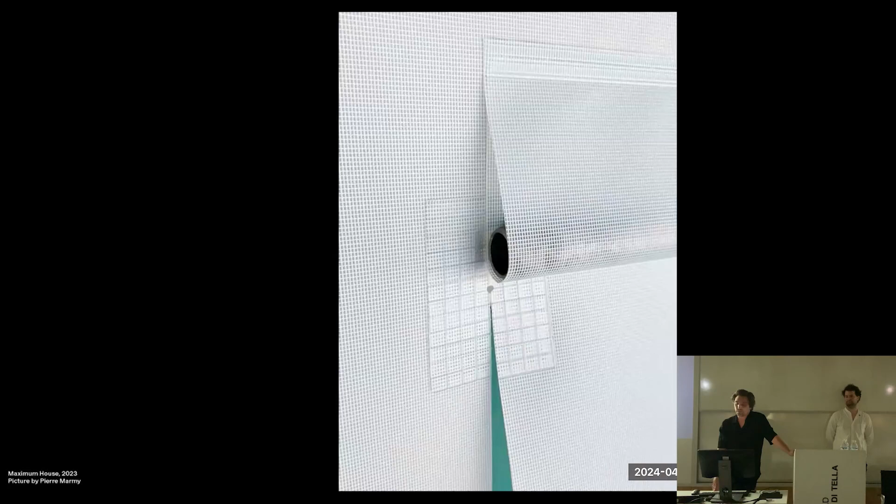But to be really honest, it's also that we love to spend a lot of time on the construction site. So we try to always look for specific answers by learning to react to the situations we encounter, the structures and buildings we find, and to see and enhance the opportunities of the situations we are dealing with. Every time we are re-questioning the constructive elements, the choice of material, and the way to assemble them, and we are always looking for a certain efficiency, trying to achieve more with less.

So let's say we have this fascination of finding the way to put things together according to the specific situation we are dealing with. We are always developing specific details and precise construction logics, as we believe you cannot really answer a specific question with a general solution or a standard detail. We don't believe in the construction detail found in the encyclopedia, copied and repeated in random places without any consideration of context, repeating the same trick over and over again. We are convinced there are no preconceived solutions, and that we need to seriously react to the situations we are working on and enhance them precisely.

We have to constantly question the norms, conventions, and standards. In other words, we need to question what we take for granted and force ourselves to change the way we look at things.

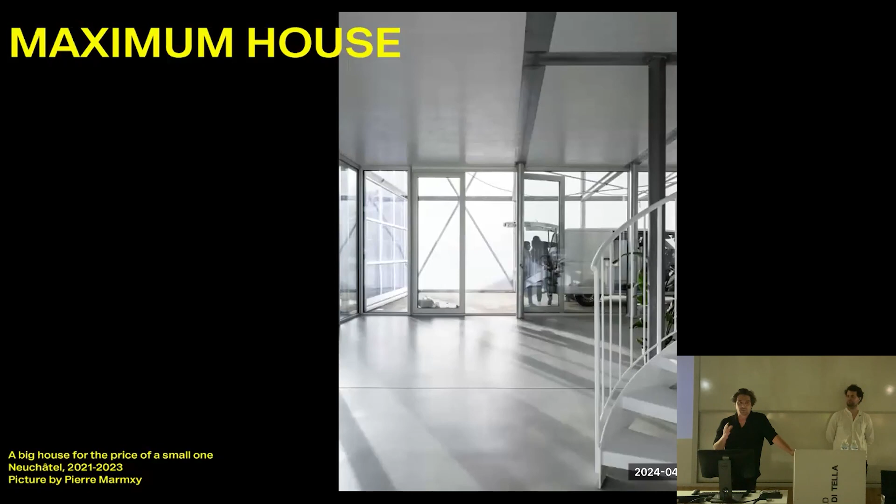So all the previous images we've seen on the screen are from the project Maximum House that we have recently completed. In this case, the biggest challenge was to answer a rather absurd regulation, which was forcing us to build a minimum of 250 square meters on the plot, when only 150 square meters were necessary for the client and feasible within the budget. So we had to turn this constraint into an opportunity. Let's say 1/3 of the house had to be built almost for free.

So this allowed us to maximize the usages and the possibilities by opening the house to a semi-tempered space, a protected area flirting with the boundaries of the insulated limits of the house, almost like living within the facade thickness.

A space that can be used all year round, a covered terrace that can be completely open, a place for parties, sport, game, and workshops.

By regulation and official building permits, it is a parking. But in reality, cars don't really bother to stay outside, leaving the inhabitants the freedom to appropriate the space in many ways.

On the upper space, each room benefits from the maximum generosity as possible, by literally pushing back its limits, the space always opens towards the next one, flowing further out.

For example, here we can see, in the middle, both children's rooms that can be completely combined into one big one, thereby neutralizing the lost space of the corridor, which disappears from the plan.

We also cherish very much the quality of the bathroom in direct relation to the winter garden, being able to take a shower almost outside by fully opening the window.

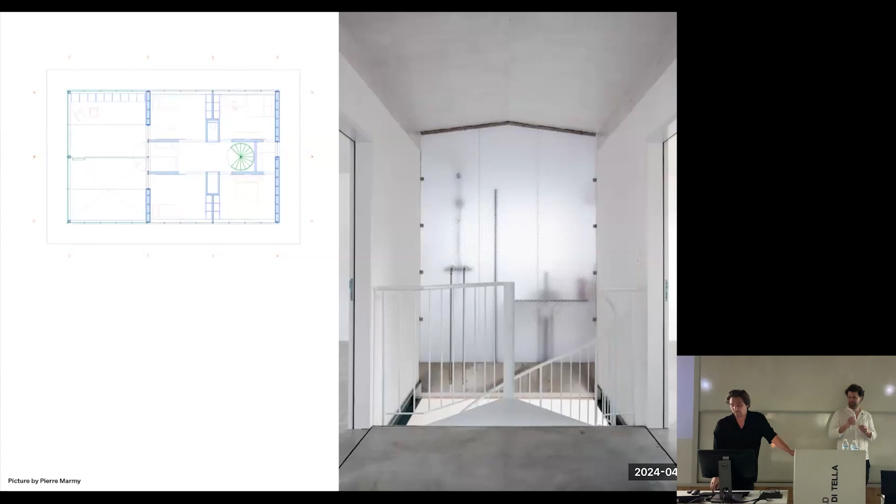You see a bit more this children's playground combined with the bathroom, basically used as one space, but also able to close both big sliding doors and sleep at night.

The additional surface area is basically obtained by distancing the final layer of the facade from the rest of the composition of this main facade.

It's a tension membrane that ensures the house is watertight, which we had to build anyway. We just took the opportunity to push it away, to distance it from the facade or the insulation of the house, therefore creating a space in between.

The membrane performs differently depending on the needs of the space. It protects, or reacts more opaquely towards the neighbors, opalescent to capture diffuse light but block views. Facing the view,

it acts as a transparent membrane, being able to completely slide up and open into basically a terrace space.

So the goal of the project is really to maximize the possibilities for using a house by blurring its boundaries. The physical boundary, the visual boundary, and the energetic boundary are broken down into several layers, allowing different configurations for different times and uses.

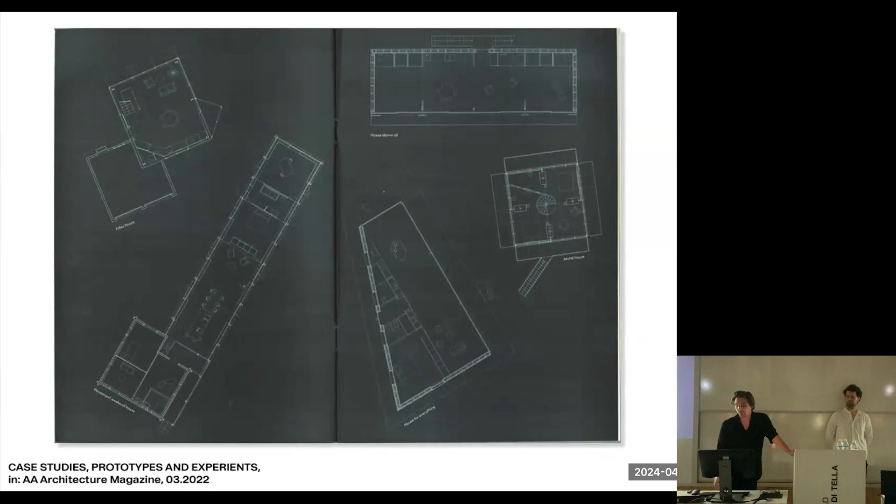Each of them, the goal of each, is really to deal with a very specific condition and trying to avoid any generic answer by developing constructions as experiments for very precise situations. In other words, we try to define constructive logic that echoes the specificities of the context in a very broad meaning.

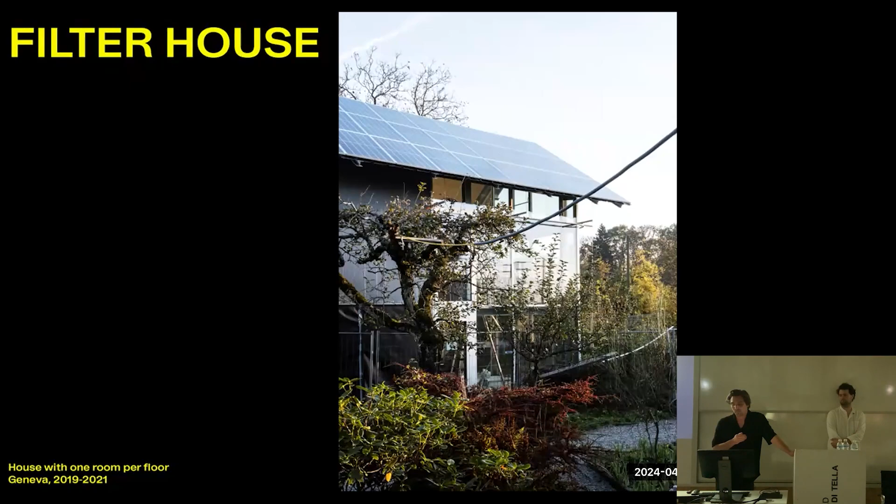The filter house is the second project of this case study series, answering to an ambiguous and fluctuating context. In that case, a beautiful garden, but with train tracks passing right on the edge of the plot, right in front of the industrial zone of the city, between the big boxes and the oil tanks. We have to admit that this is a type of contrast that really stimulates us.

It is a project that makes the climatic fluctuation of the environment an opportunity for space to evolve and react, rather than trying to resist and isolate ourselves against it, reacting to fluctuations of the close surroundings and of the climate and environment in general.

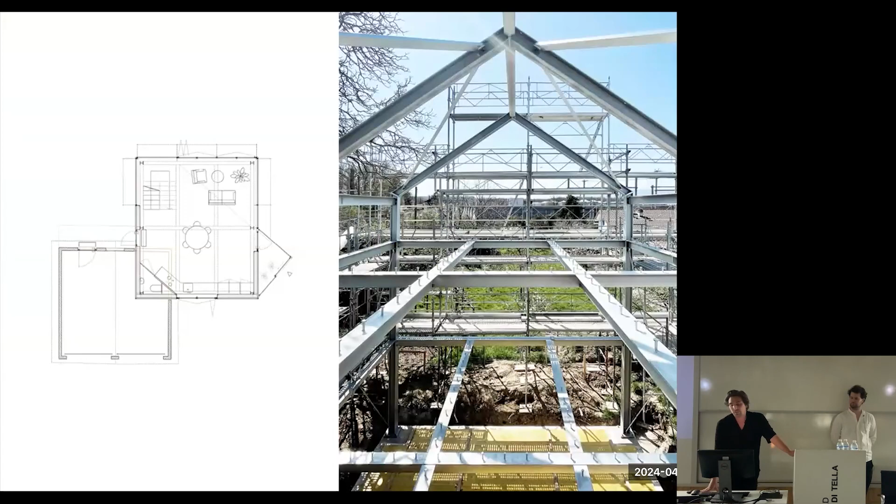What we can see in the ground floor plan here is the relationship with an existing garage structure, which is the square on the bottom left, that was already there and that we decided to keep. We could use it to insert all the technical equipment of the house in order to free completely the ground floor plan of the main building. Therefore, we also didn't have to build any garage or basement, taking advantage of what was already there.

One of the other main constraints of the building was to be extremely compact in order to leave as much space as possible for the garden.

The structure is a prefabricated structure which is completely pushed towards the outside of the plan, which allows it to be freely and entirely open and fluid.

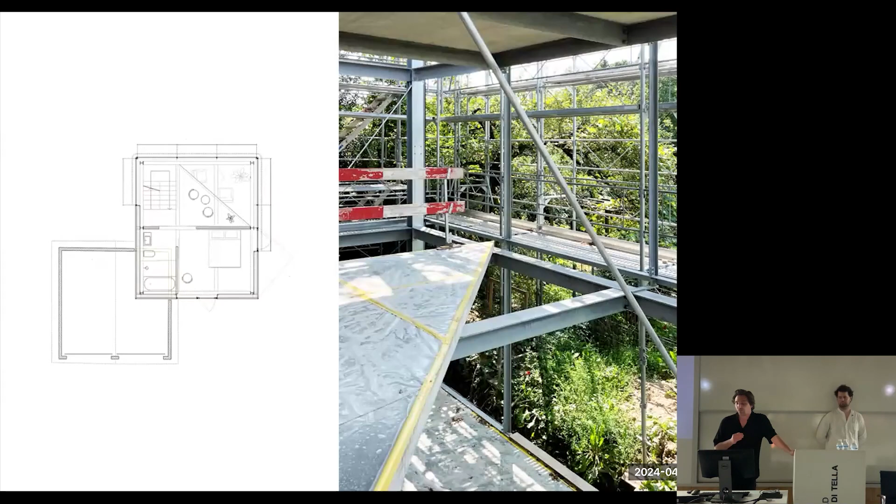The goal is that these plans should be super easily modifiable and adaptable according to the needs. We have to confess that at the stage of the construction picture we see here on the screen, we still didn't know where we were going to organize the partition walls. It's something very important for us, to be able to react and adapt during the construction site.

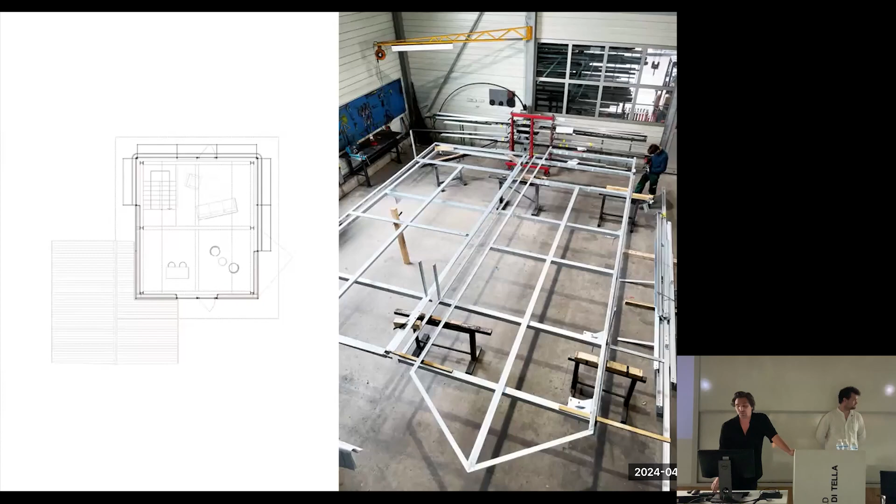Maybe the most impactful device of the project came by rethinking the constructive elements. In this case, the facade that we decomposed into a series of layers of filters, like exterior vegetation, exterior curtain, glass, ventilation gap, interior curtain. The goal was really to understand every parameter of the facade in order to decompose it into these different layers, allowing to negotiate the climatic condition of its two sides.

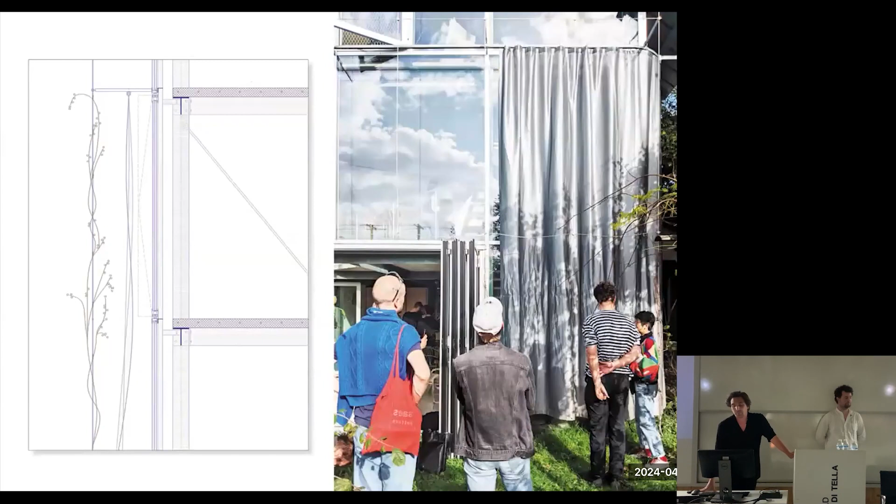Here we see this big outside curtain that can be completely folded in front of the house, either to protect from the views or to protect from the sun. The big open foldable windows and cables for plants to grow, but we still have to wait a bit.

This beneficial relationship to the surrounding also requires some efforts from the inhabitants. It means engaging directly with the environment, understanding when to draw the curtain, how to cross-ventilate, and it really requires a certain effort. But it's also what is so beautiful.

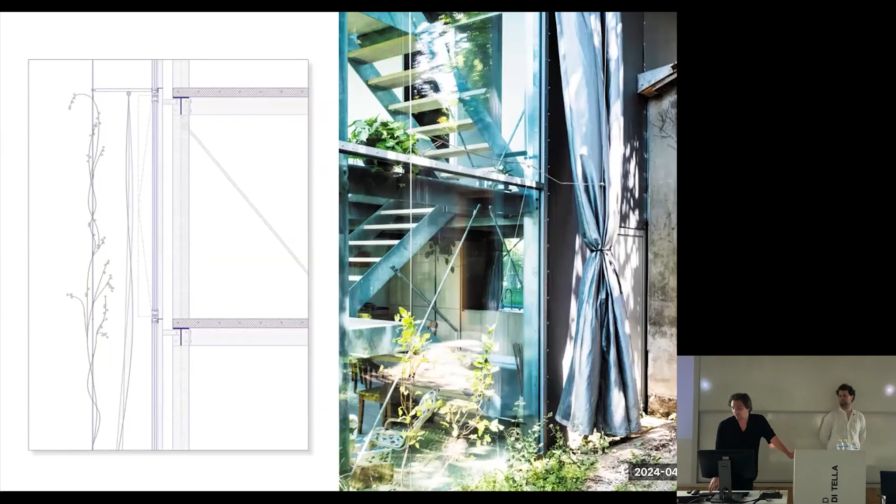We really like to say that it's more a complex tent than a house, where the users can adapt each layer according to the conditions. From the other side, you can directly derive your basilicum from the garden.

Here we start to slowly see the plants growing along the facade, which is mainly the biggest filter that we developed in the project. But as I said, we still have to wait a bit. We go there every few months, and each time it's a bit bigger. With this picture, maybe already one year ago.

As the plants were chosen to lose their leaves during winter, in the summer they form a very dense protective layer against the sun, and in the winter all the leaves fall down, allowing us to gain all the solar gains. We almost don't need to heat the house at all during winter.

We also like to say that the project is done by the assemblage of things and objects—let's say some projects within the project. It's always a question of how to connect the structure, how to assemble, how to combine, and how to give different meanings to things, down to the very little detail, which we also produce ourselves.

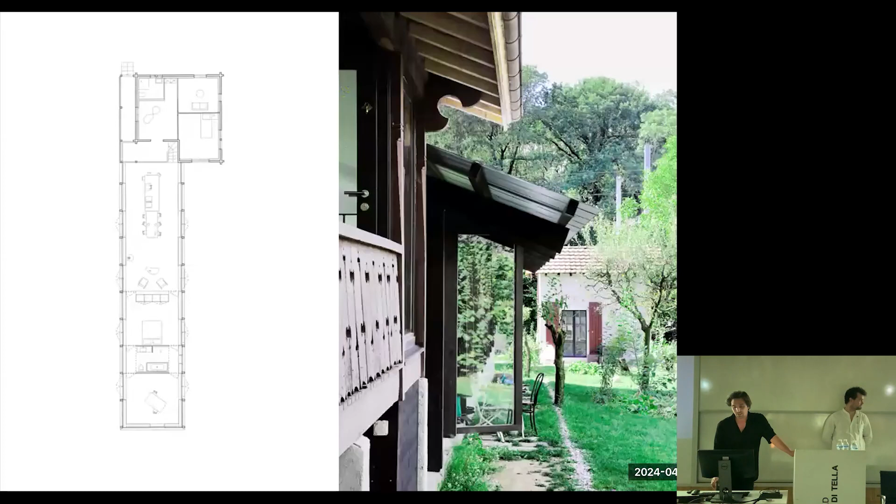Another project from these case studies is the permanent weekend house, also our very first project. In this case, there were a series of specific conditions: one was the particularity of a very longitudinal plot with very dense and very beautiful vegetation.

The second condition was the existing structure of a prefabricated chalet, a very small structure we see on top of the plan, a square building of 45 square meters, which we had to convince the clients to keep—as it was already there, why should we demolish it? Maybe the last but not least condition was an extremely small budget and almost no time to realize the project.

The main idea was to extend the main living room of the existing chalet, which we see on top of the plan, 25 meters down, resulting in a plan 4 meters wide by 25 meters long. This narrowness allows living constantly in direct relationship to the garden—we can say it produces a long shell in which some light furniture elements are placed to refine the series of uses in unfilled spaces.

Another thing is that all of these furnitures never reach the top of the ceiling, because the existing chalet is 1.50 meters higher than the extension. So from the chalet, you can see through the whole house.

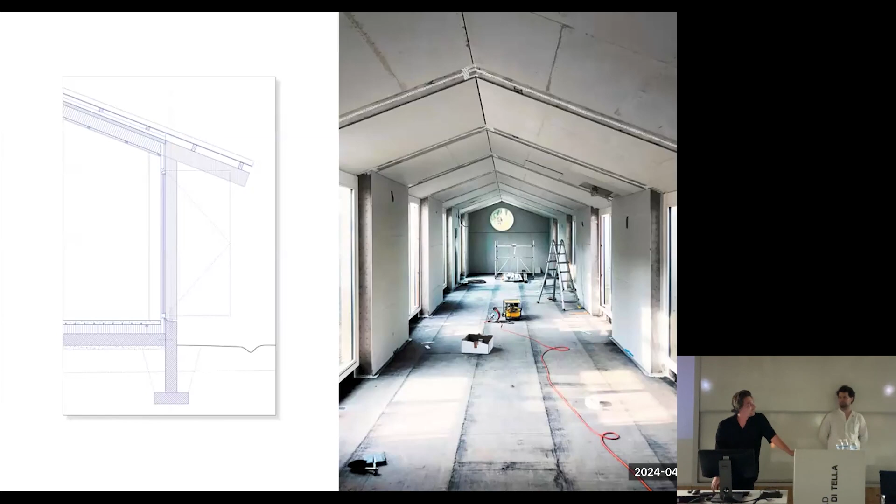In order to be efficient, the construction consists of a highly simple section, a wooden frame repeated 10 times from the existing little chalet and throughout the whole plot. This repetition allowed us to save a lot of time and money. The main volume, or the section, is basically defined from the shape of the original chalet, which we simply extruded.

At the end, it becomes a very rich assemblage of two different types of structures, both very simple, but once articulated together, they produce something we couldn't have expected, allowing you to go through the house like walking through the garden and taking your bath within the trees.

In the case of the House for Everything, the main context was a social one. The project is located on the edge between a historical village center and a large field, an orchard with many fruit trees. By directing the large roof towards the village, it echoes the surrounding roof structures, while on the other side opening wide into the landscape of the fields.

But the relationship with the village is above all a social one. It is at the same time a home for its residents and a gathering place for the village population. It aims to respond to the lack of community space in the village since the recent closure of the local restaurant, which was a big drama, as it was basically the last common space of the village.

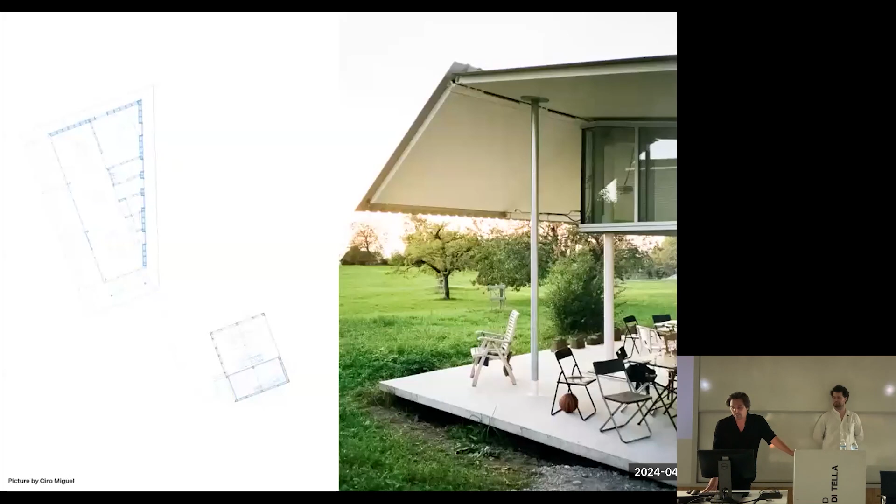By offering a very wide range of uses like workshops, exhibition space, dining rooms, yoga rooms, concert rooms, and a theater stage, this duality in the program between a house and its public equipment is achieved by the organization of the plan. On one side, a very generous space, freed from any constraint or constraining elements. On the other side, a series of rooms with very specific functions, seen here on the right side of the plan: bedroom, bathroom, storage and kitchen—a performative setup that supports the generosity of the larger space.

What was also important is that both should be able to function separately or independently, being able to use the house by itself while a big event could happen in the main room.

The flexibility of the space is therefore amplified by a device that allows it to react to the fluctuating and uncertain parameters of the environment, and to adapt to the different needs of activities it should host: a long pivoting roof activated by hydraulic arms that allows the condition of the living space to be completely adjusted.

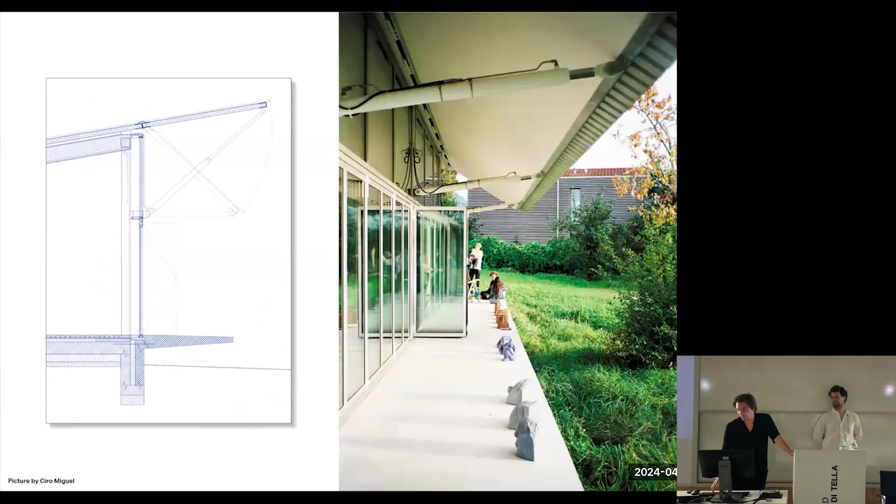From a very large open plan emphasizing the relationship with the surrounding landscape, capturing as much natural light as possible, to a much more protected space once the roof is tilted downwards. Here we see a bit more of this pivoting axis on the four arms, and the big facade that can completely open towards the fields.

This extends the activities of the house to the terrace that runs all around and serves as a secondary circulation. From this side, we see the public entrance of the building, and on the right you could guess the more private entrance to the house.

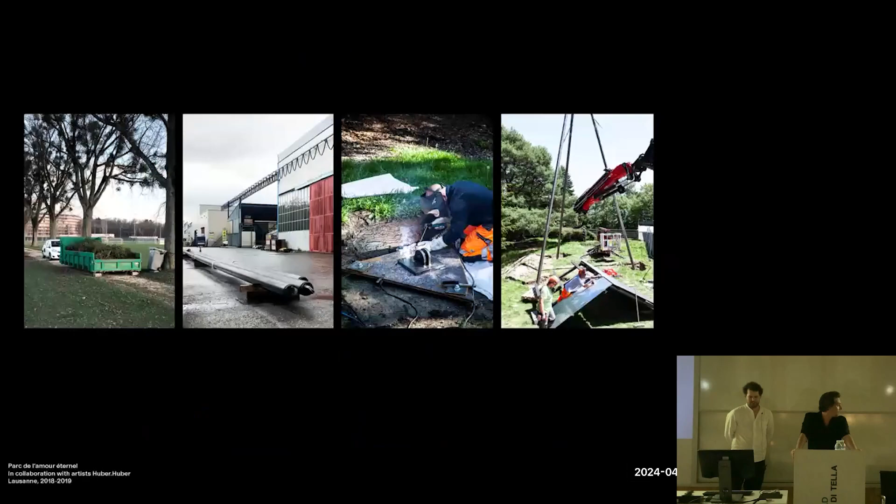So we are working with many diverse scales, with the aim that architecture responds to wider criteria. We are working on the interaction of climatic, cultural, economic, political, urban, and social factors on the built fabric. So working on these different scales also implies pushing for a multidisciplinary practice. We want to blur the traditional roles and encourage collaboration between architecture and other disciplines.

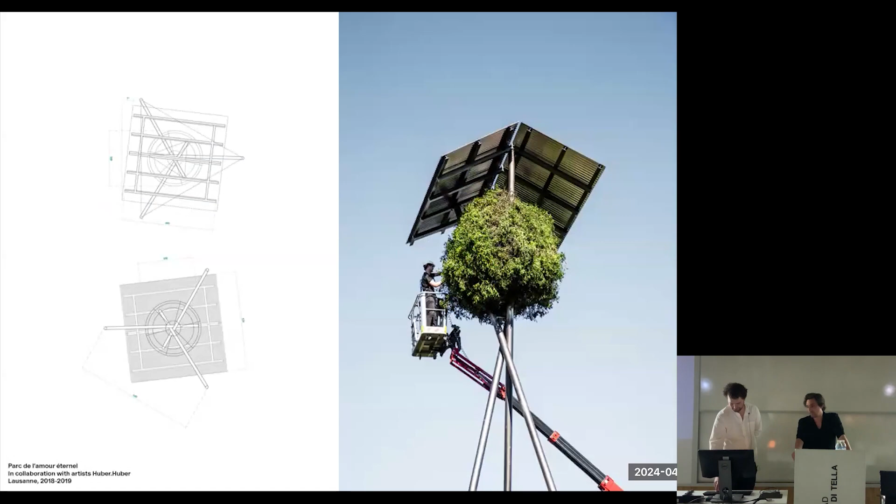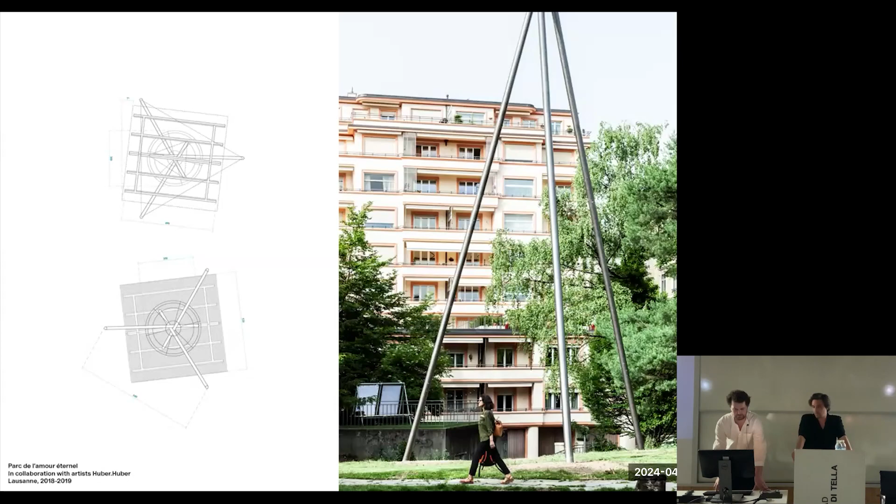With this approach, climatic phenomena emerge as a fundamental aspect on which architectural efforts are based. We see climatic phenomena not only as a challenge to be met, but also as a guideline in the design process. And we want to integrate our project as optimally as possible with the surrounding, seeking a beneficial relationship between architecture and everything that comes with it.

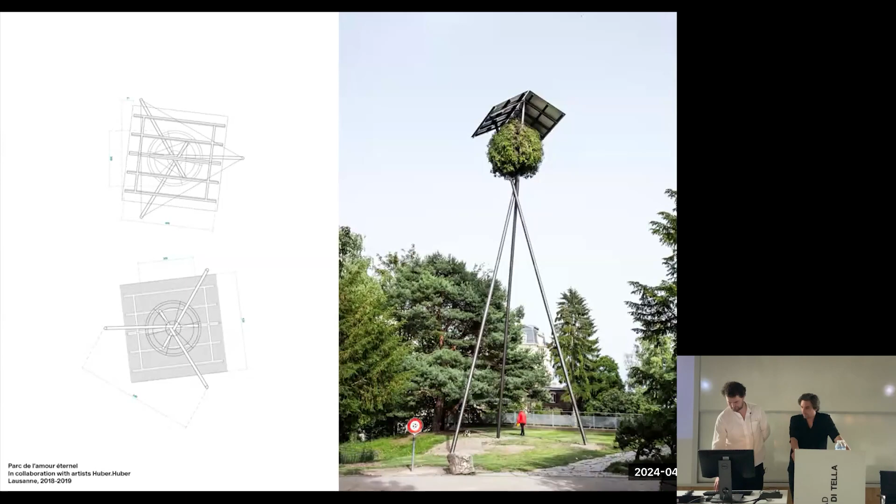The few pictures you have just seen are from a project called Parc de l'Amour Éternel, which could be translated as Park of Eternal Love. This is one of our first projects, in which we were taking into account non-human environments: plants, animals, soil, water, and mostly birds. It's an installation in the city of Lausanne in Switzerland for birds. It's a 20-meter high steel construction where the birds can come eating the seeds and spreading them around the city.

To intensify its vegetation. Let's try the microphone again. Okay. Yeah, I think it's good. No? Try again. Right, I get yours.

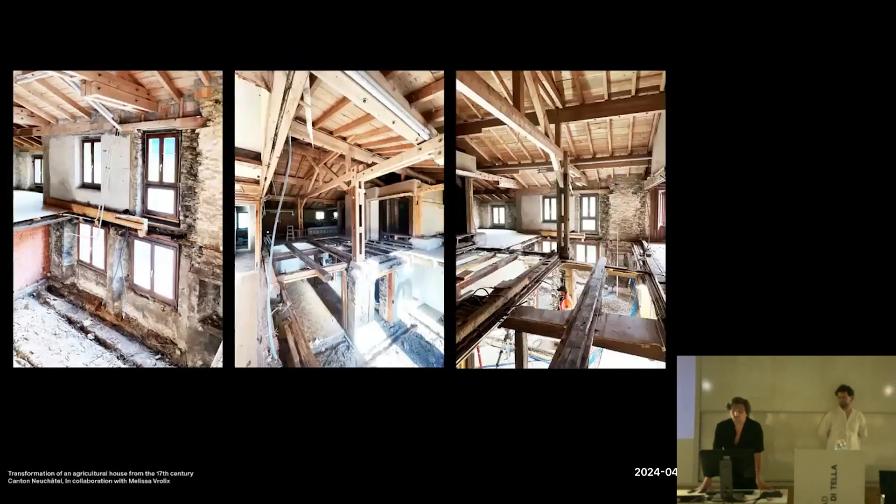So, triggering what's available. In the global climate crisis we are all trying to deal with, we need to develop processes to promote the efficient use of resources. To us, this starts by taking a serious look at what already exists, what is available, and by developing a deep interest in what we see and discover. What qualities exist, what should we keep, and what needs to be improved. We need to rethink our strategies and methods, starting from the existing or the available.

And somehow all projects are the transformation of an existing situation or context, and there is always something to take out of it. Such an approach cannot follow any preconceived way to act, norms, or standards. The process of designing becomes a series of reactions based on careful observations throughout the project.

With this approach, the practice of the architect is more like that of a researcher: finding and discovering, observing and understanding the existing qualities of what is there, investigating the potentials, and interpreting what we observe to develop a precise and subjective reading of the situation we face. Each project has to respond to a specific situation with a proper and precise intention. We are deeply convinced that working with what's available is an opportunity to generate innovative architectural solutions that respond precisely to existing parameters.

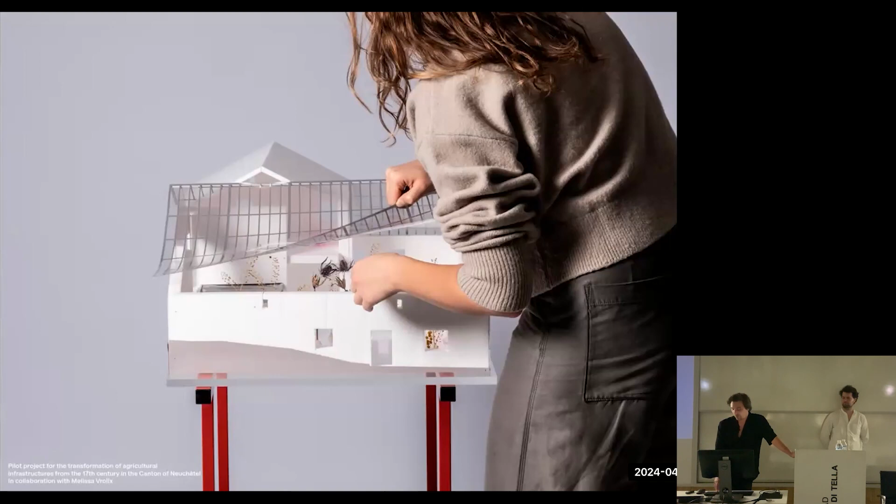The few images we have just seen are from a series of pilot projects we are now working on, initiated with the Heritage Office of the Canton of Neuchâtel in Switzerland, a region in the Swiss mountains, for the preservation and transformation of old traditional farmhouses. These projects propose not only to work with the existing structures or built fabric, with a lot of care in transforming them, but also to provide a structure to maintain their agricultural function and be suitable for contemporary ways of making agriculture today.

Indeed, many of these farmhouses are today too small to fulfill any agricultural function anymore, and are being turned into housing lofts for new generations, completely losing the purpose for which they were built. So what was originally a building used to store wheat and cereal is now adapted into an infrastructure to grow vegetables through some very specific interventions.

First, changing the classical roof tiles with a greenhouse-type glazed roof; a new infrastructural device to collect rainwater and redistribute it for irrigation; and most of all, the treatment of the soil in the interior of the structure, breaking down the existing slabs, allowing the creation of a perfect condition to grow vegetables within the structure, inside the building but still in open ground.

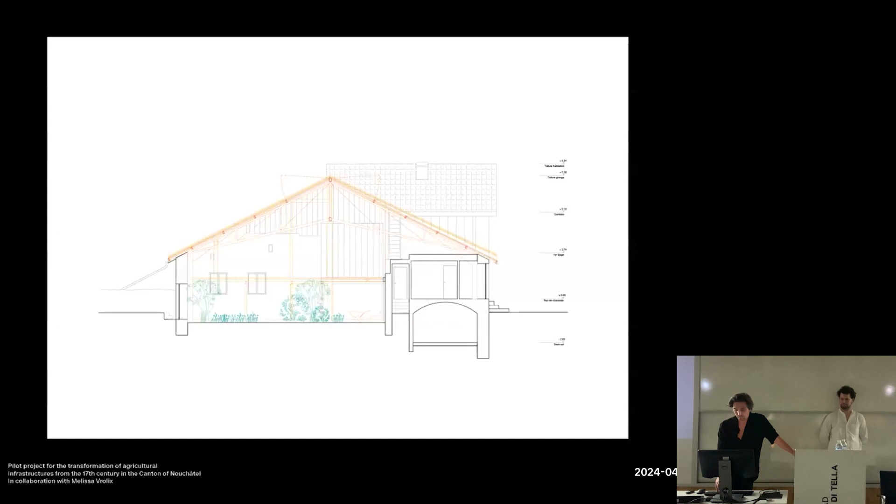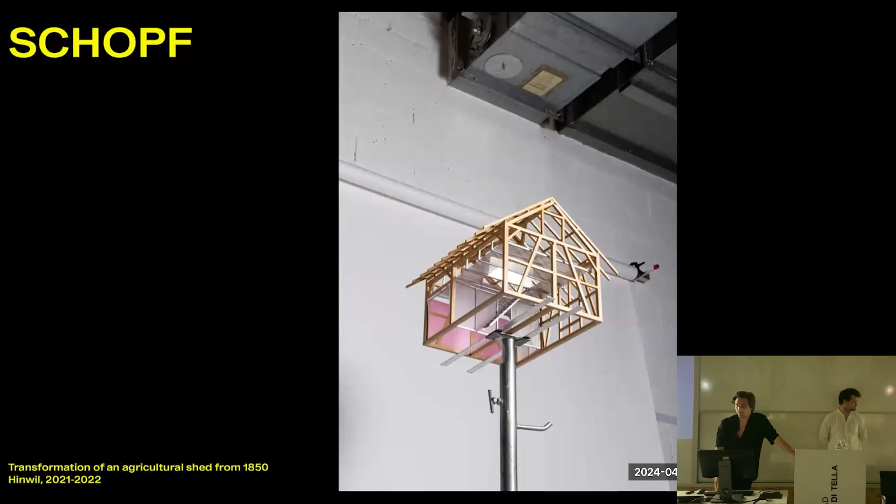It's a project about valuing something which already exists, valuing an available structure and the history that it carries. Most of all, it's the project of convincing the owner and the client to maintain and transform it instead of demolishing it, which was unfortunately their original plan.

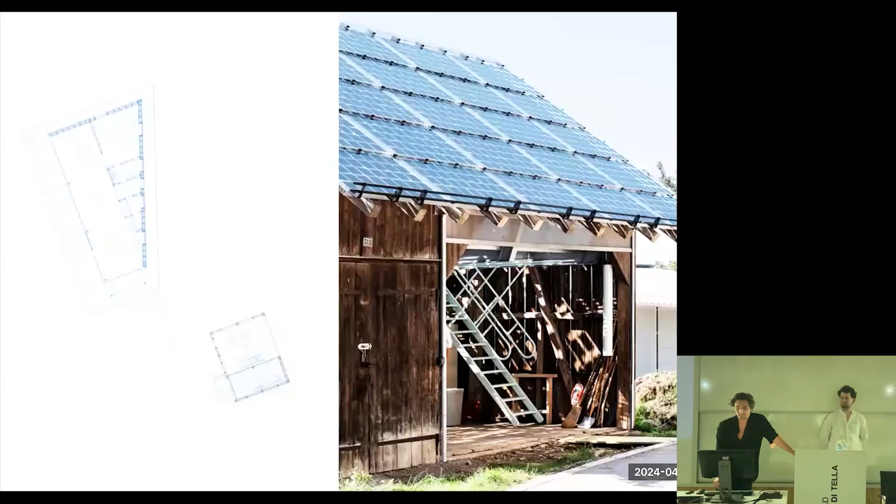In the end, we managed to build a project with half of the budget originally planned by the owner for its replacement. The goal of the intervention was to stay very simple and pragmatic, fixing or solving a few problems in the existing structure, fixing what didn't work instead of starting from scratch.

One of the first changes was to lower the first floor one meter down in order to make it a usable volume and therefore to gain a floor.

Then we had to add a stair to make it accessible, and in order not to lose too much space, we made this stair escamotable. You basically see the counterweight, and when you don't need it, it lifts back up.

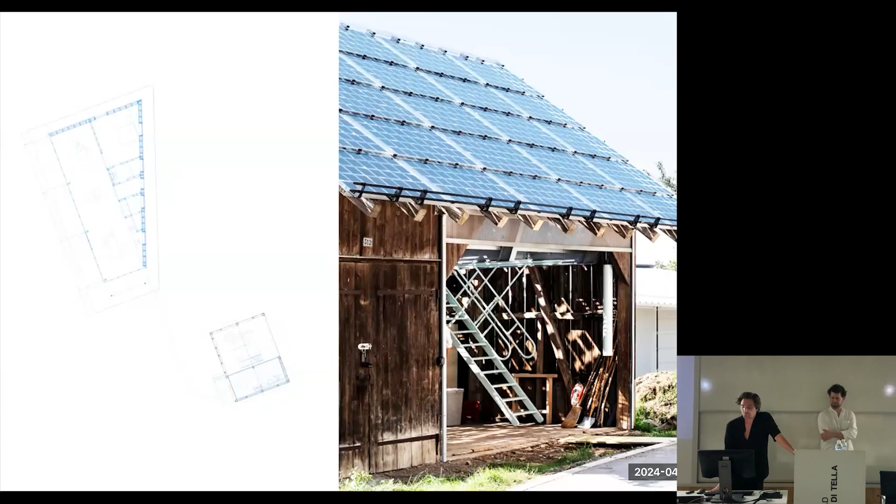For security reasons, we just added this metal mesh that allows things to be stored safely, without breaking any visual connection.

On the other side, we cut a large piece of the facade and put it on hinges in order to open the space towards the fields. I think it's probably the cheapest and the biggest door we ever managed to build.

We also used the opportunity of the proximity of this barn to our other project to install most of the technical installations required by both houses in the barn. And we provided the roof with a large number of translucent solar panels that now produce more than 10 times the electricity which we need.

By convincing the owner to transform this old wooden structure, by allowing him to understand its value, we did not only save him a lot of money, but the space also now allows for much more than what we had expected. It's now used together with the house for almost everything, to host events and activities for the inhabitants of the village.

Here we can see the detail of how we lowered the floor, which basically also allowed us to reinforce the existing wooden structure in the same move. And the space is created between the semi-transparent solar panels and the graded floor.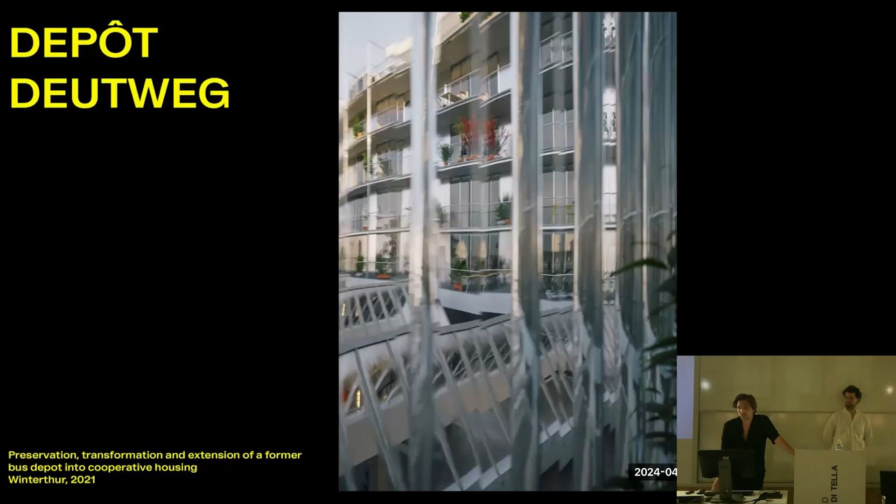Our proposal was to work with the entire existing structure by transforming and extending it, whereas the competition brief was asking to mainly use the central part and to demolish all the rest of what was on the site. So basically all the project came from this decision to keep what was existing, starting from there and developing the project from what was already there.

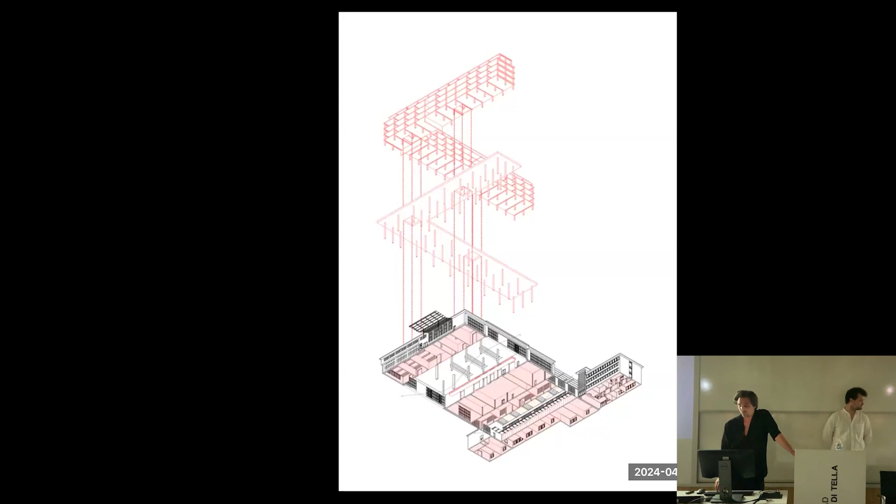It has produced many moments which we again could not predict or expect, things we could never have been able to draw from scratch. Somehow the need to deal with this existing structure allowed us to offer much more than a simple housing building.

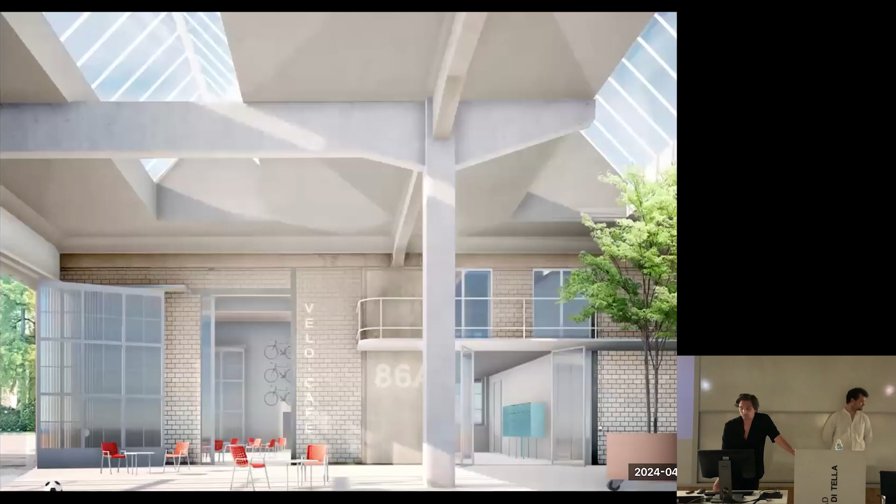The main existing central hall then becomes the entrance for all the apartments, where communal activities can take place — meetings, parties, concerts — basically a large covered space for the inhabitants, but also for the city. The best is that everything was already there; we just needed to change the way we look at it through a meticulous transformation.

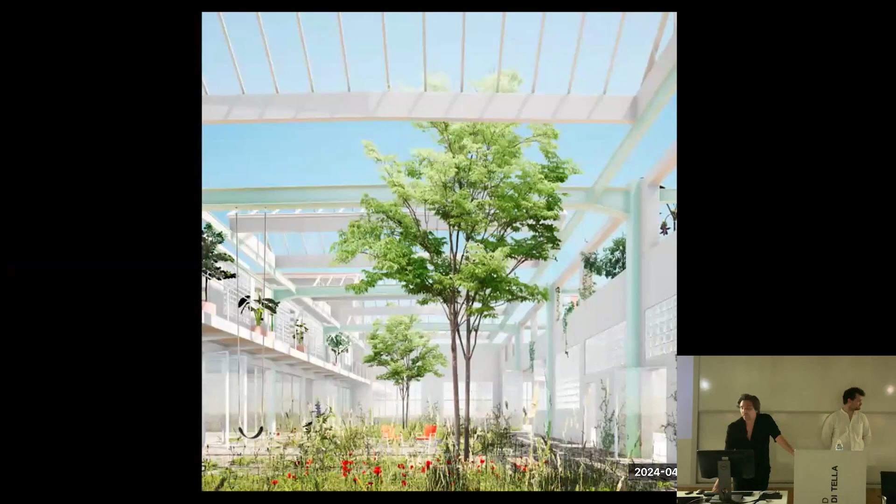This decision to keep the existing also allowed us to provide much more diverse programs and typology, enhancing the variety of the housing typologies and spaces we could produce. For instance, all the building parts here are existing fabric. We just removed part of the roof in order to create this shared garden for the maisonette typologies on both sides.

So by reacting to the structure of the bus garage, we were able to propose more qualitative, more generous typologies, and also much more fascinating moments.

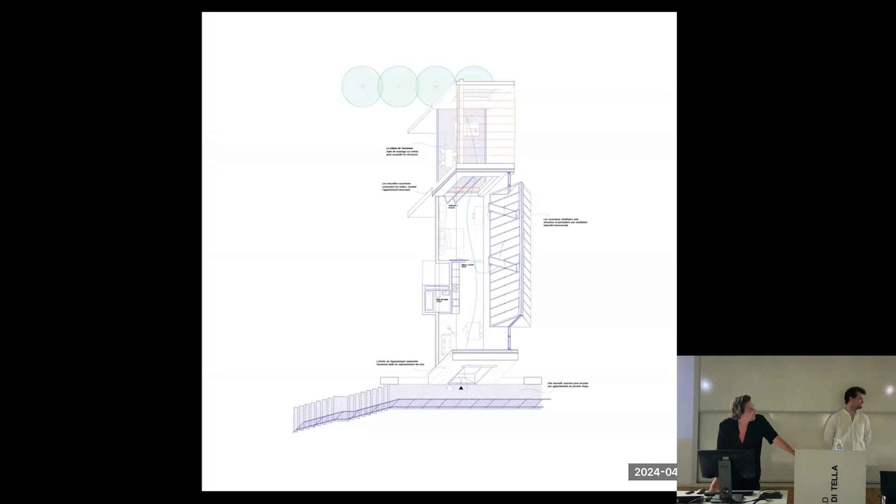Existing spaces of the building were also transformed into very interesting typologies, ones that for us were much more interesting than the new ones. Typologies we never had dared to draw from scratch in the Swiss context - with garden views to the sky, private gardens, personal staircases, and much more.

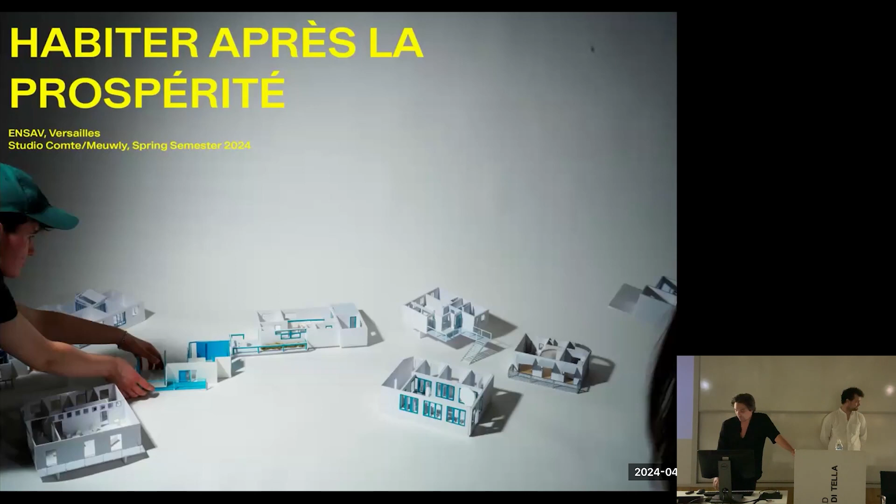Making the most out of everything which was already there. The notion of triggering what's available and making the most out of what's existing is, we can say, an obsession for us. We now have the chance to share the same obsessions with our students at the architecture school in Versailles. We are starting by creating an analysis or atlas of precise typologies of transformation, a repertory of logics of transformation.

Starting from there, we are looking for strategies to value and transform existing structures.

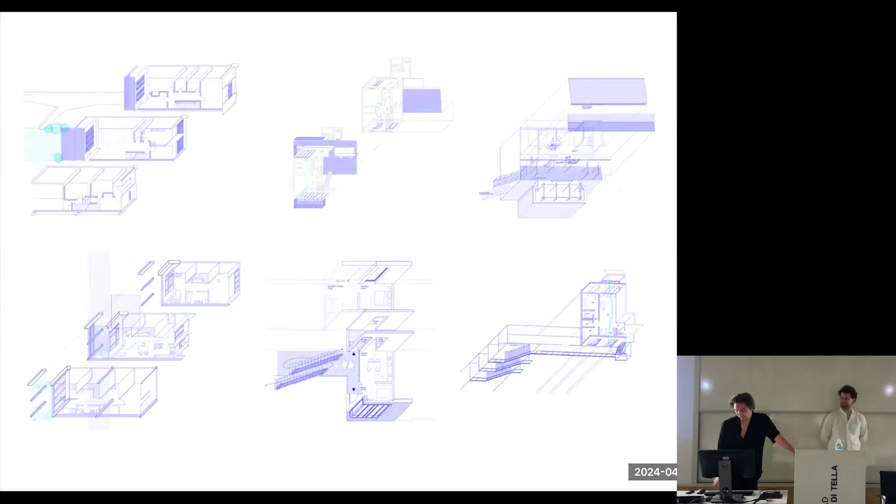This notion of sharing doubts, questions, and exploring with students while teaching has led us to experiment a lot in many series of workshops.

Like this. Okay, so the last of our four chapters is called hands-on - basically the act of doing. It's about projects being a long series of steps, iterations, trials, attempts, failures, and mostly hypotheses. We see the project as a succession of actions and reactions, always having a precise aim in mind, but never anticipating the outcome.

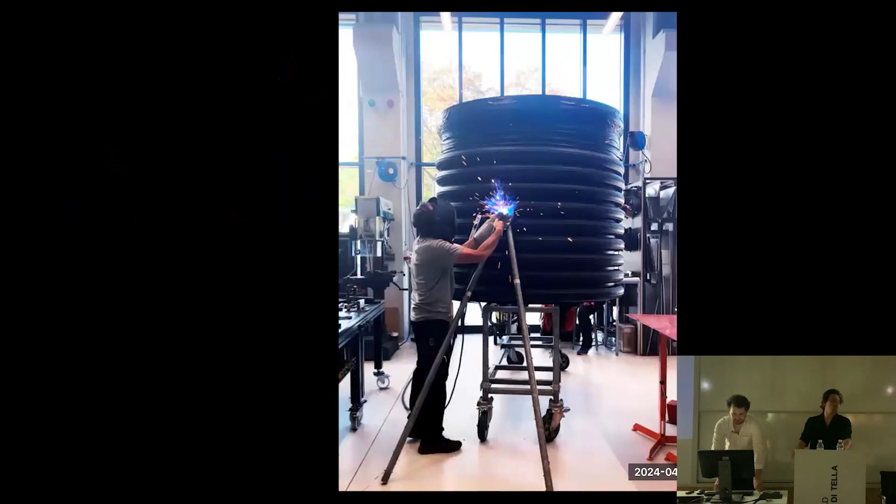Nobody knows how it will end. So we are working a lot with our hands. This is something we really appreciate, and we do it for all projects at all scales.

During workshops, we also apply the same attitude on a construction site or on bigger scales. This is to us a very direct way of understanding and clarifying what we are doing - to be confronted with real questions of dimension, weight, detail, and assemblage, of putting things together, and to be able to try out an experiment.

The idea is to develop specific details for the construction we are trying to solve. And it's also about leaving room for appropriation, for what could happen.

For example, this installation on the right, done by a group of students in Geneva, completely changes the appearance, or the way we understand this element, once it's lifted from the ground - somehow losing its weight.

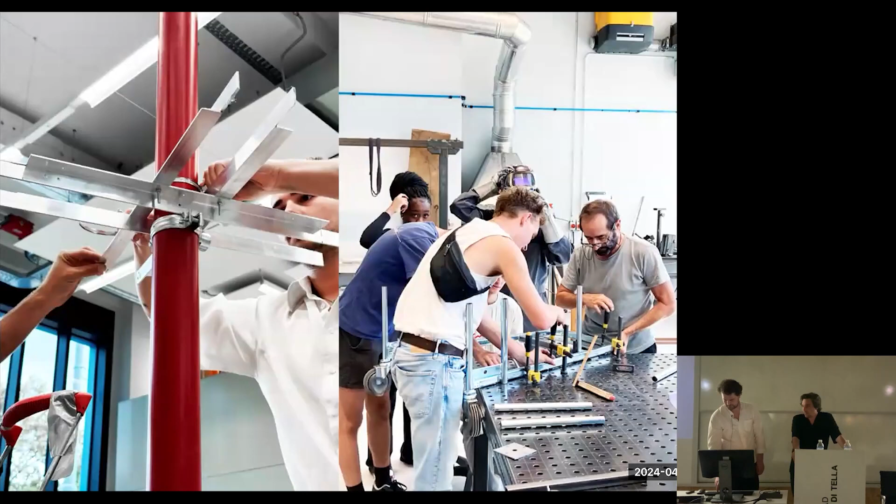Each time we try to act as precisely and efficiently as possible, but always looking for the most beneficial impact. So we are looking for simple decisions, but with the widest impact possible. We are developing specific details, testing ways of building and assembling.

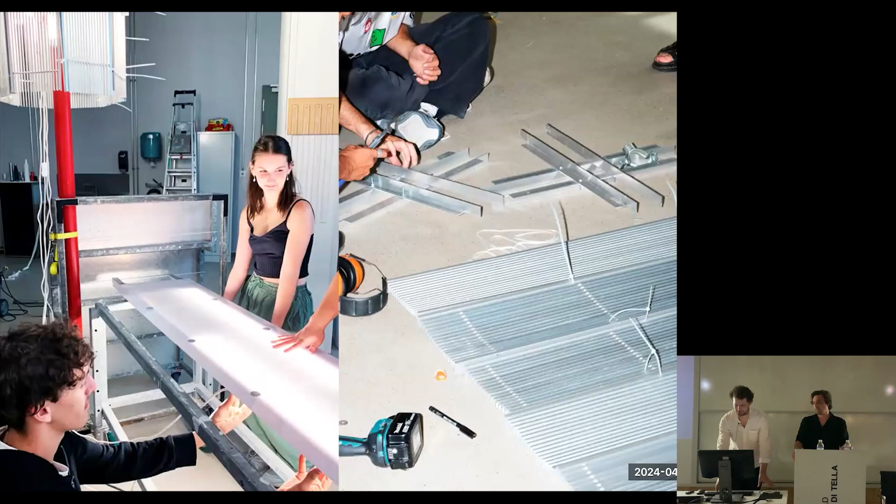This means we consider all projects as prototypes - they are all tests, all experiments. These are not always successful, but the thing is to be able to react and adapt according to what we understand by doing with our hands.

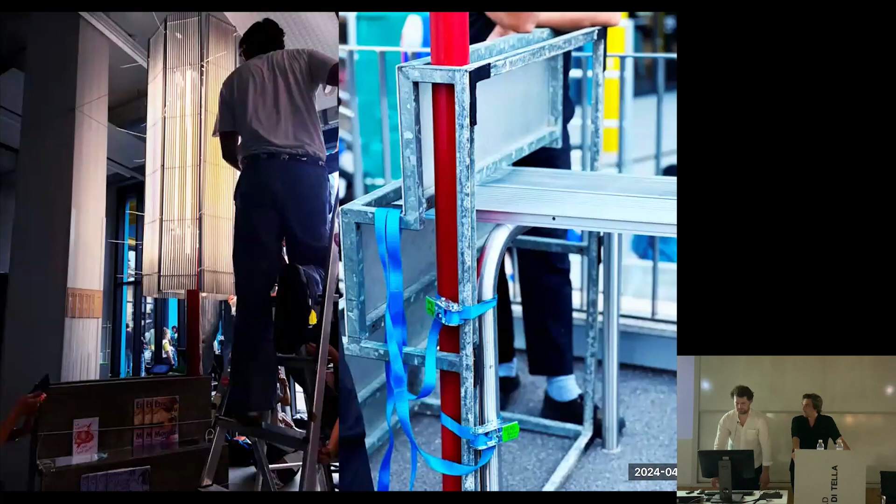We are looking for a specific way of assembling, of putting things together. We are not applying standard construction logics, but we tend to find a specific answer to each situation, for each constructive problem, for each piece of material. So it's really an experimentation from the detail, from the construction, from the material.

These images come from a series of workshops we were leading in past years at HEAD in Geneva and also at the University of Antwerp. We had the chance to work with a very large group of students, which was also an amazing energy, especially when you try to build a lot with your hands.

We were starting with collecting materials - leftovers from construction sites, but also unused materials, or even things we could dismantle from buildings that were about to be demolished.

Then it's about changing the understanding of these materials through precise assemblage, but also by putting them into action. This is why we call these workshops performing devices.

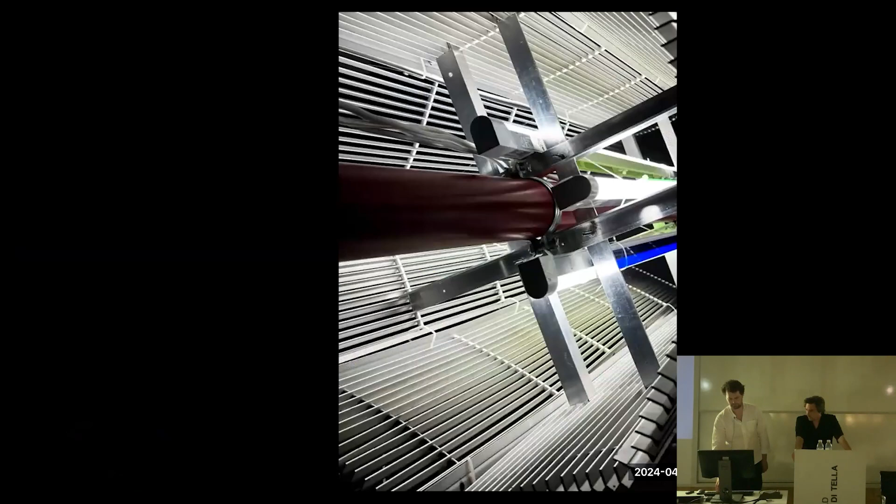For example, on the right, working on the position of this large industrial pipe and completely changing the way to experiment with or understand it. Or finding the way to assemble a large amount of different profiles, grids, and other elements into a coherent ensemble.

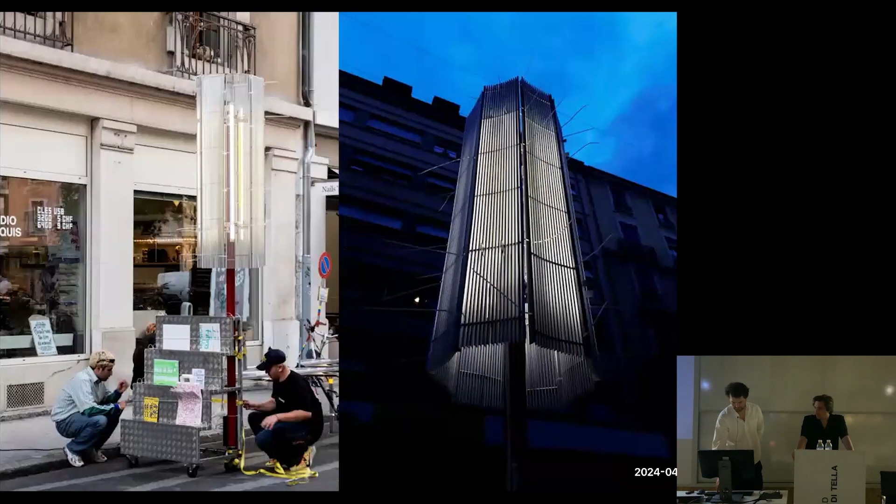What was amazing to us about this workshop is that we managed to go out of the school. We were working directly in the city, so the different devices were provided for associations for the city, for their activities. Here you see outside support and a meeting point for a local radio. Because this hands-on approach is also about learning to react to a context, to the street, it was really a way to learn about this and to provide at the same time something for the city in a very direct way.

Here's a simple activation of a crossroad with a movable kitchen and fireplace. From one side, it's an open fireplace; from the other, it's a kind of kitchen where the heat is transmitted through concrete pieces. This device came from L-shaped concrete elements that were leftovers from the construction of a street, some bricks, and half of a shopping cart. By combining them in a specific way, by finding the details and the construction logic, it becomes much more, and especially it allows for an action to take place.

So by doing with our hands, we try to reach simple and efficient constructions. To us, this is something fantastic, which we really like to do.

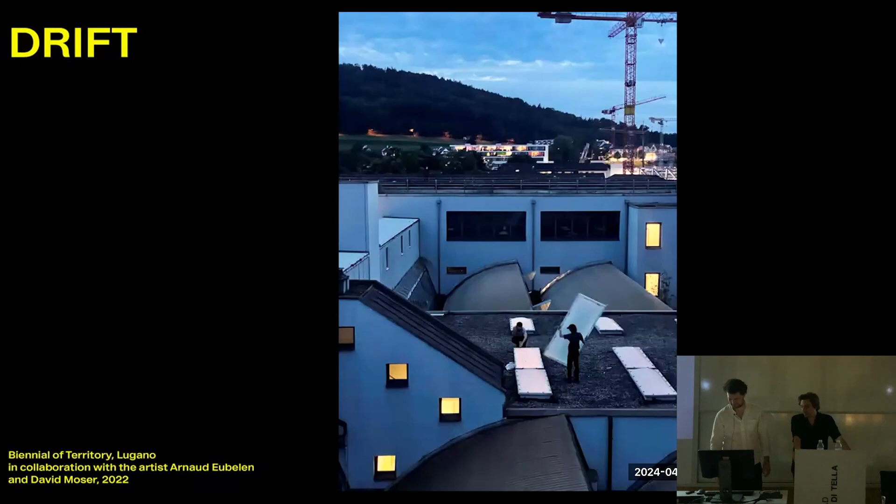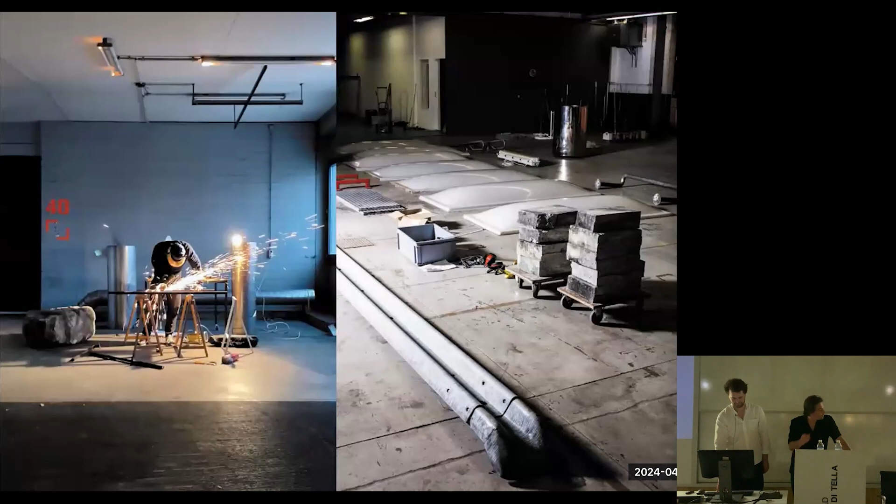In collaboration with the artist Arnaud Eubelen from Belgium and the architect David Moser, we spent a lot of time collecting pieces from this building, collecting pieces and materials without really knowing where it would end, but just because it was there and available. This allowed us to develop a very physical relationship to the building itself, cutting concrete slabs, dismantling elements, and building up our own catalog of components, basically taking pieces of the building and collecting them in the building, working the mine.

Then we could develop new ways of assembling all of these materials together. In this assemblage, they suddenly gave a completely new meaning to these pieces. We're really pushing ourselves to understand the materials for their best qualities, their best performance. It's always a lot of testing, of experimenting, and in this case we put them all together for the Swiss Biennial of Territory.

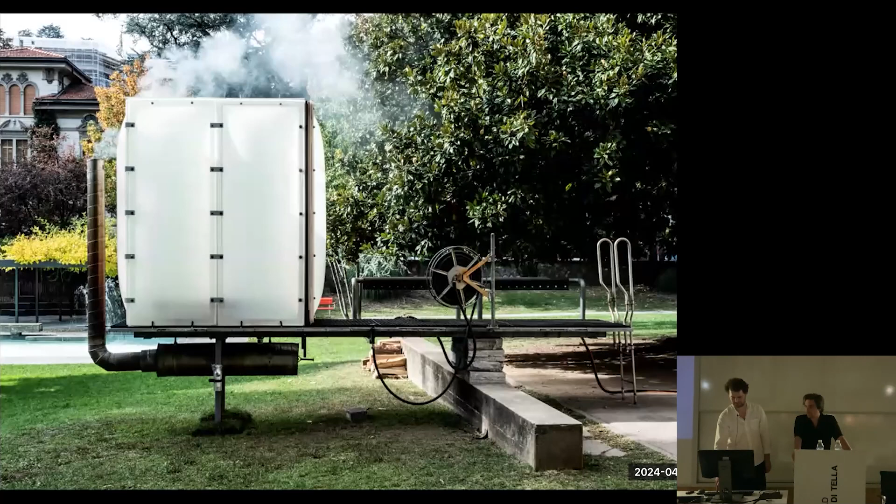All of these elements were reassembled into a steam bath, a hammam. It's an installation or construction that was accessible to the public in one of the main parks of the city. Every piece came exclusively from our old former atelier building, and the only thing we needed to develop were very specific ways of assembling the elements together. Then we left a pile of wood for people to activate it on their own, which really worked out.

So, very pragmatic solutions.

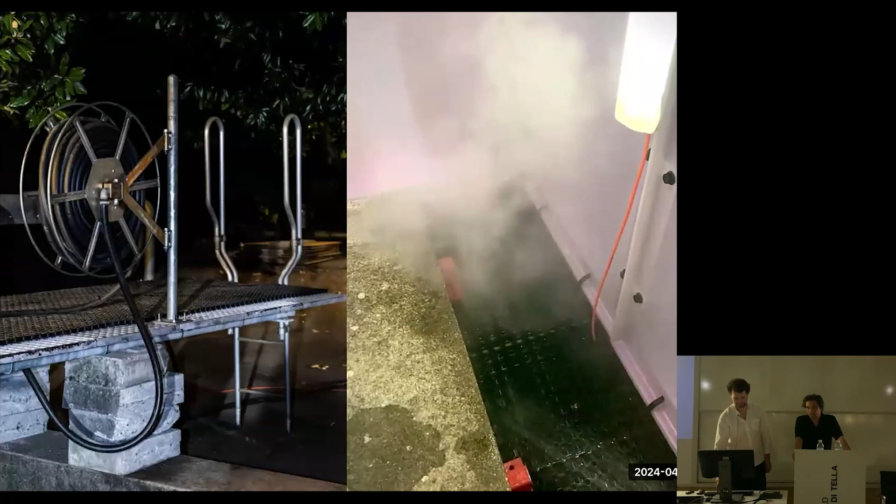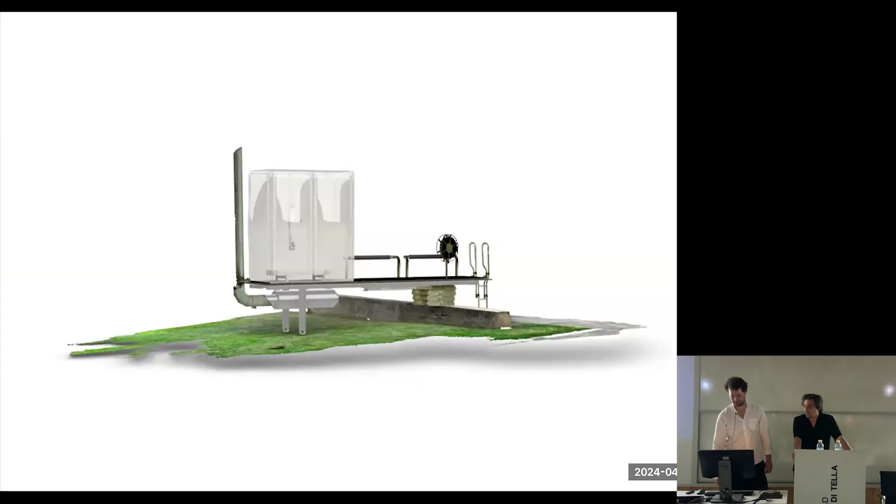Again, each project is a pretext to question what and why we are doing things. We could not really see this one way of assembling the pieces together as an end result.

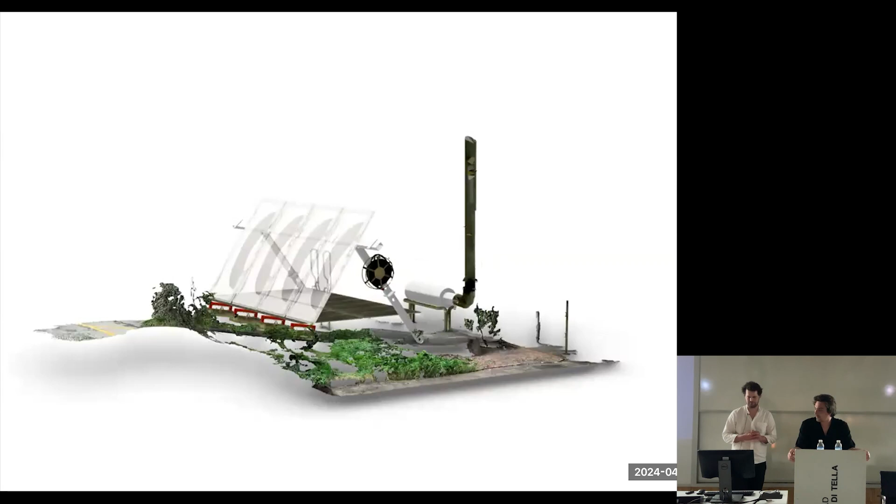We started a collaboration with the chair of Karin Sander from ETH, and we could scan all of these elements, which allowed us to test new assemblage in a new way. We are now developing new configurations to use these elements in collaboration with the Accademia di Architettura di Mendrisio.

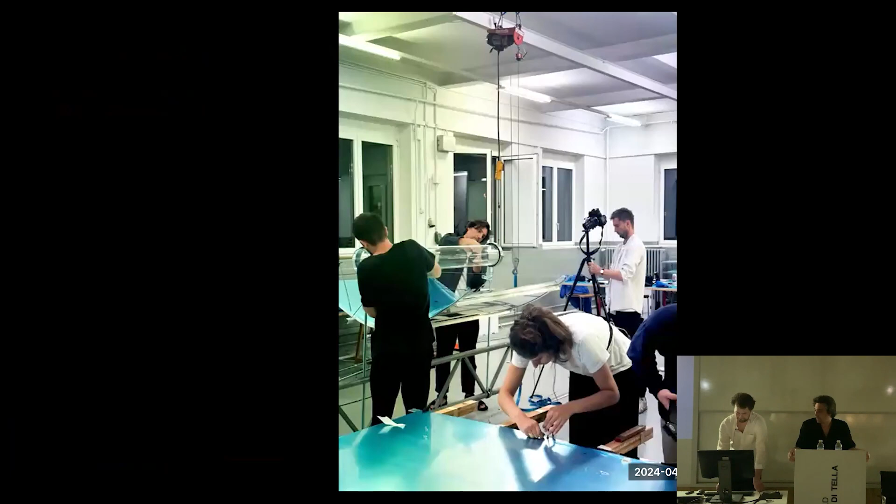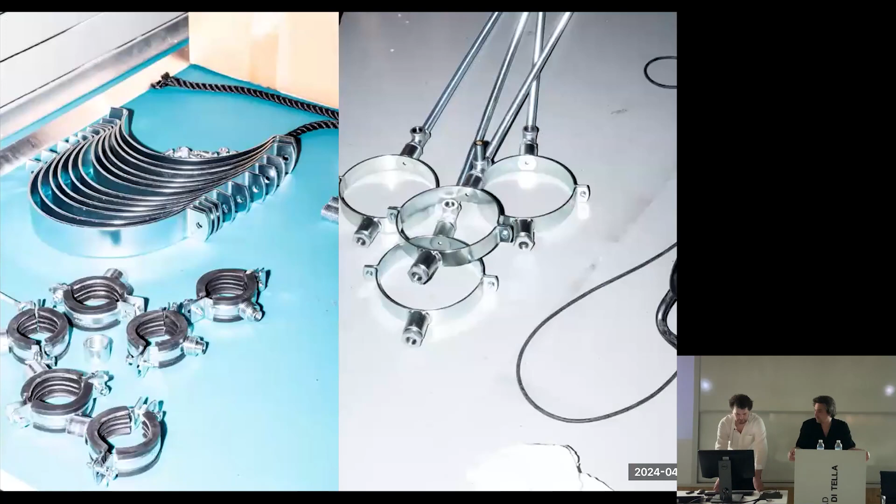With the same hands-on attitude, we have developed a solar oven for the Design Biennale in Zurich, again building everything ourselves in our atelier. This allows us to develop every detail in a way it's really thinking by doing. It's a process of collecting many leftovers and standard pieces.

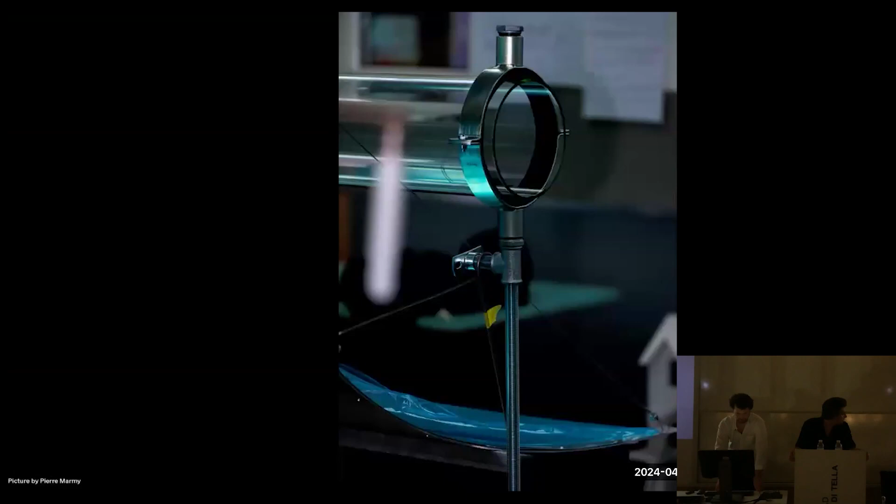The question is again how to put them together, and how to put them together into a performing device. Then it needed to be transported from our atelier to the botanical garden of Zurich, through the whole city, creating quite amazing encounters.

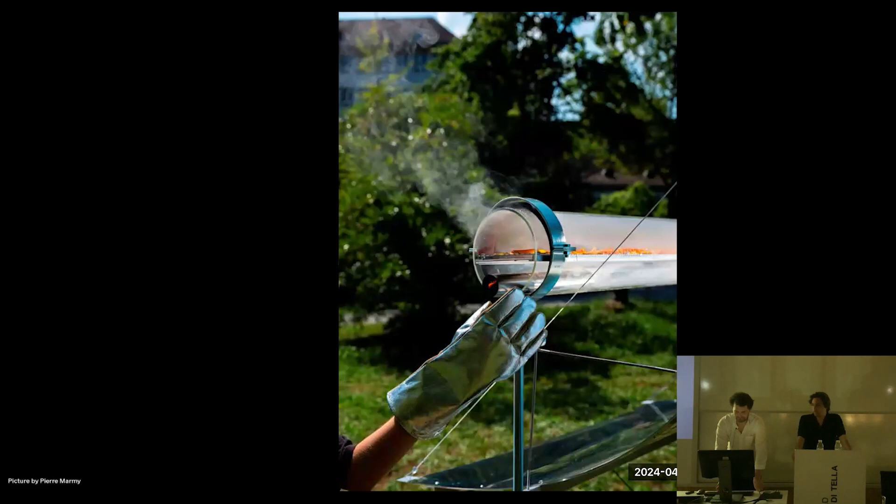Technically it's a pretty direct assemblage. It's tension cables, and this tension creates the perfect parabolic shape to redirect the sun rays into one focal point, where the heat is stored into glass tubes, reaching incredible temperatures we could never expect. It has this very pragmatic system of following the sun with one turning point, two wheels, and then the axis of the parabola can rotate, always keeping the focal point adjusted.

Talking about this hands-on approach, it is very important to us not to make a clear boundary between the prototypes we build in the atelier, in the workshops, and the construction site. We always try to follow the construction site as closely as possible in order to be able to apply the same attitude.

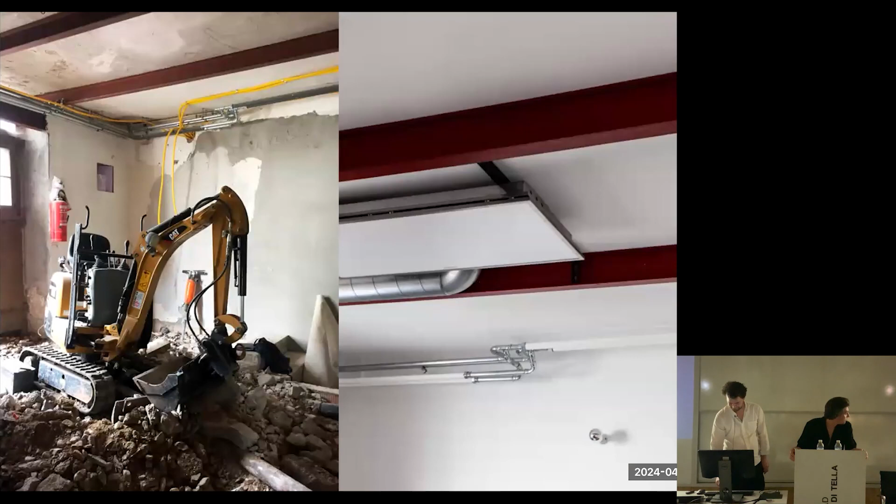Like here, in this project called Club of Sound, when we got the commission to refurbish an old village house, we started the construction without really knowing where it would lead, but we were convinced that the project would come from the discoveries we made on site. It's almost like an archaeological attitude.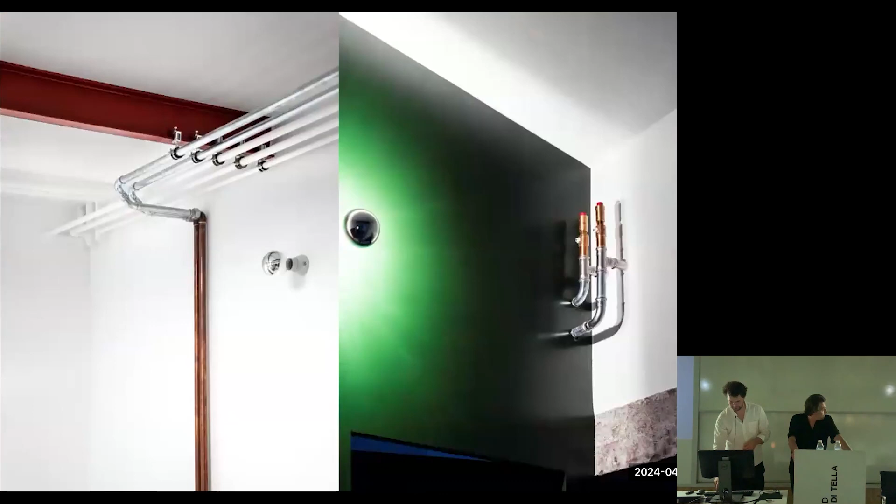Always revealing what is already there and transforming in an acupunctural way, changing the way we perceive things with a series of precise interventions, changing the garage door, adding a new hut for the entrance. So it's a project made of many more projects, really step by step, reacting to the discoveries during the construction site, starting from the interior of the house, and then turning into a place of gathering for the people of the village.

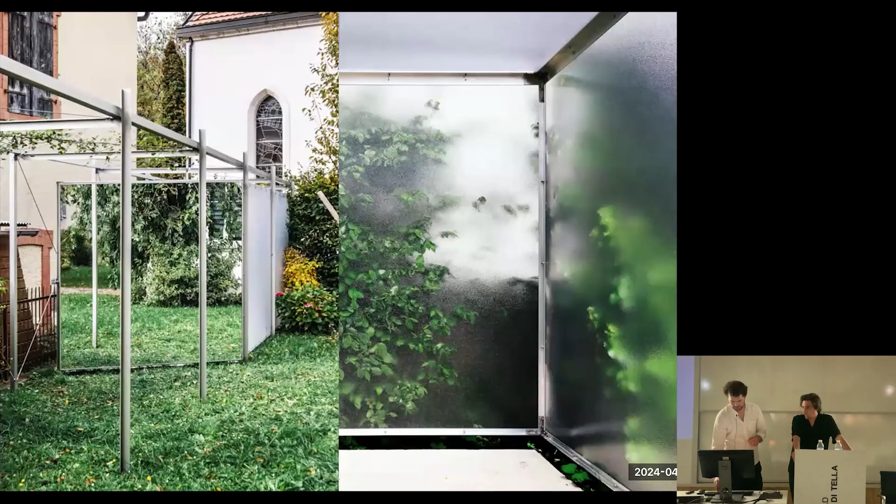It's a series of interventions that also spread to the garden in a further step. In the end, everything is actually just a pretext. For example, the pretext of building a garden storage that turned out to become a wonderful space in the middle of the garden, which is now used completely differently from what we had imagined or planned.

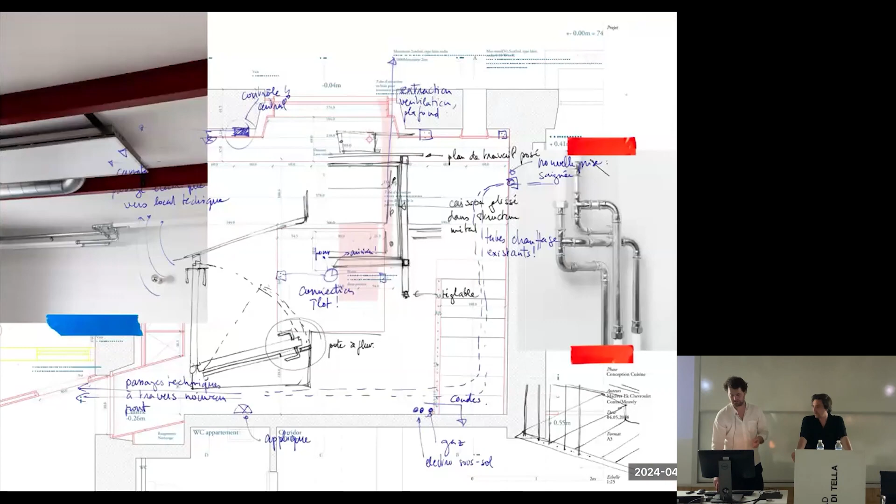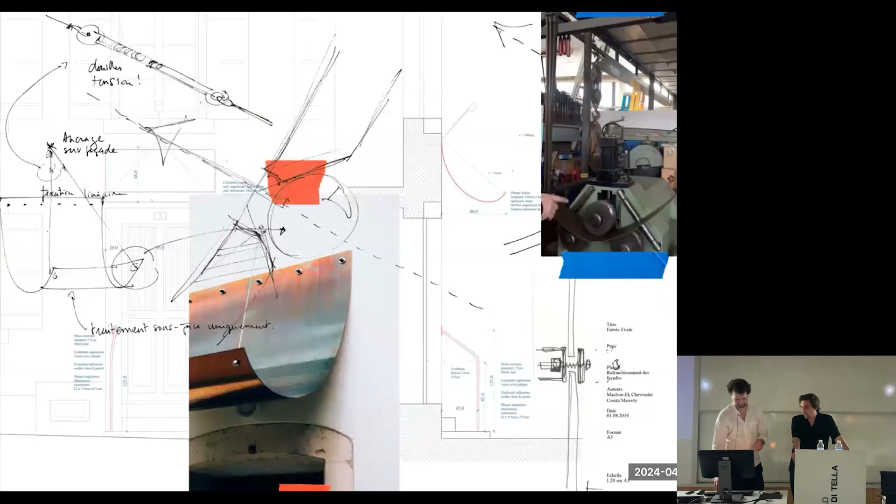As we tried to somehow hitchhike or modify the building process, we were not drawing everything in advance. We also had to develop new tools, which are maybe less perfect, but certainly, we believe, much more precise, again drawing the project down to each little screw.

With the Sunset project, the clients basically asked us only for the renovation of this pretty old and also heritage-protected building. So our concern was how to re-question this basic assignment and always try to offer more. How can we as architects redefine the assignment?

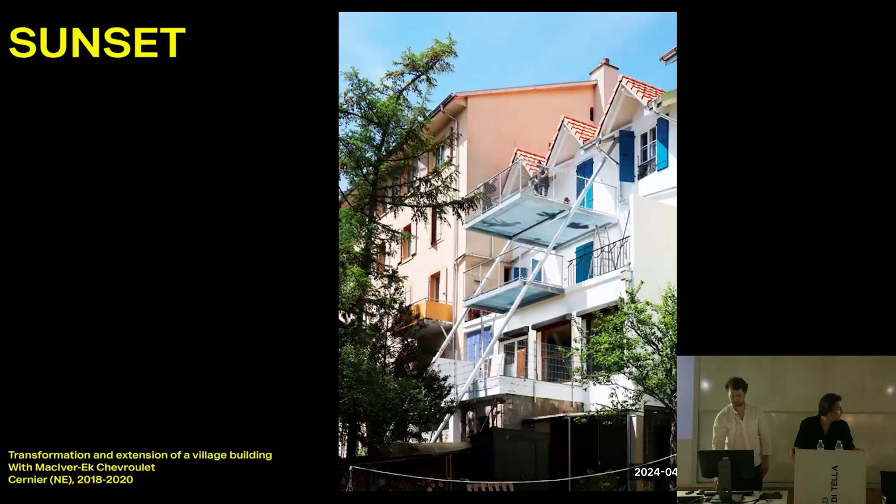Basically doing something that was not asked, but with the aim of providing something more. It's not just about added value, because we deeply believe that we could offer more than just refurbishing these flats, which honestly, as we found them, didn't have great qualities. What we proposed was to reduce the expenses of the refurbishment by finding potentials that were already there, or many times also by not doing things.

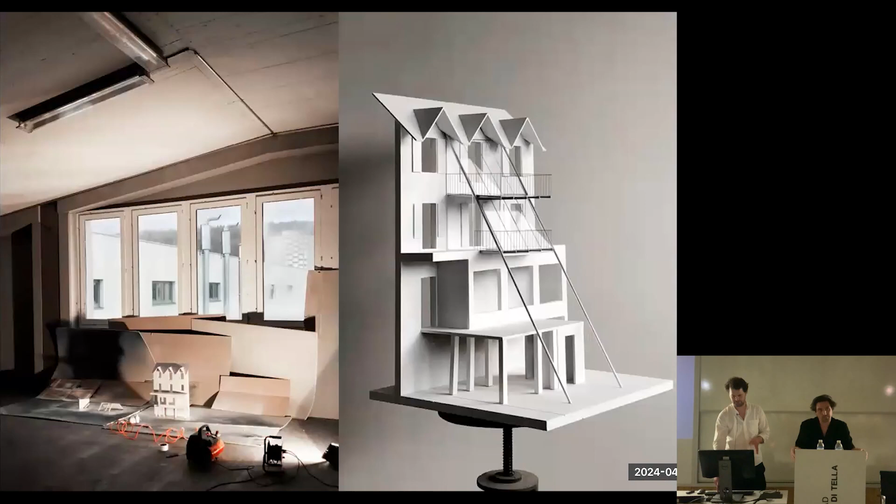Maybe mostly by doing a refurbishment project that our client could build themselves. So we were not drawing plans, we were actually preparing construction guides for the client, like how to cut a wall or how to build a kitchen, and then they were producing it. This allowed us to save enough of the budget to propose a construction of new terraces and winter gardens, leaning on the existing facade.

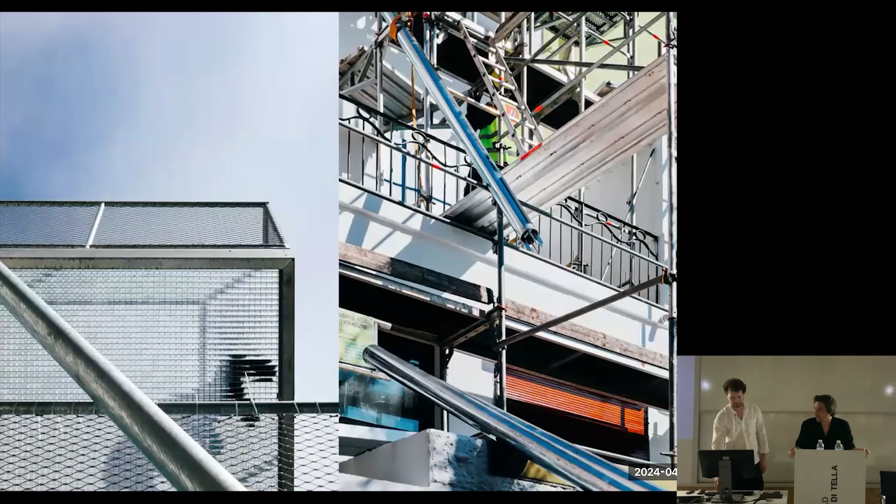So then we had this clear challenge from the transformation phase, which once again became kind of an archaeological site, discovering the old flooring under the many layers of the previous renovation. So it was a lot of surprises, some good and some bad, as always.

And the form of these terraces comes from the very few construction rules of this region, saying that you have this angle that you're allowed to build, and that's what we followed to build the outside space. It's also the maximum space we could provide following the regulation.

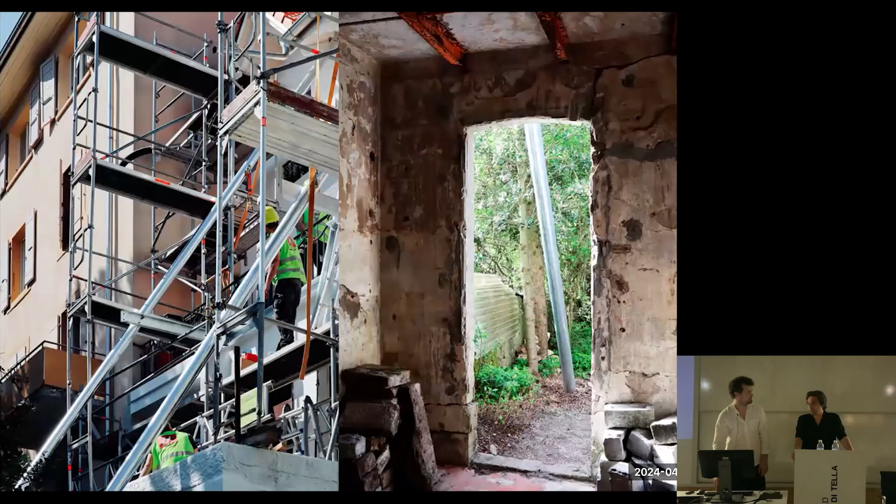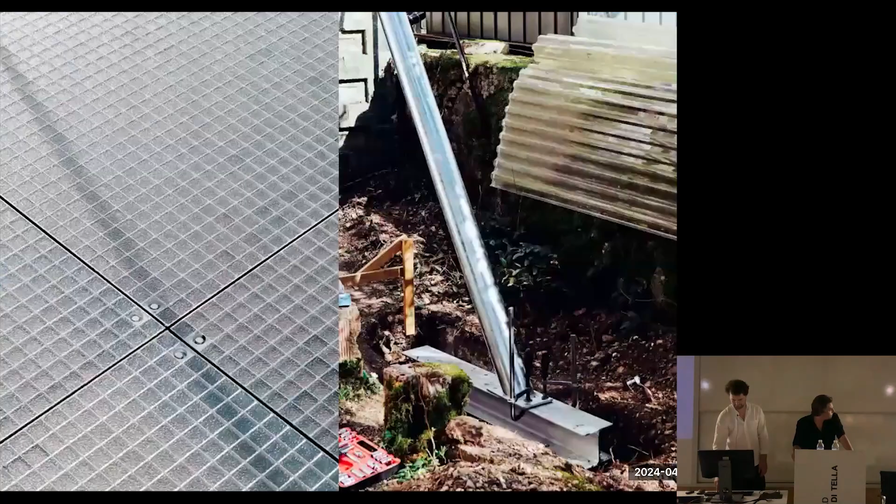So in the end, each floor has a very generous terrace overlooking this fantastic landscape. And also it has the smallest impact on the garden, with just a few screws.

And to finish the lecture, we have this short video of our former atelier space that we really like to show, because it shows something we are convinced about, which is the relation between the space where we work and what we produce. And we have been working in this place for 5 years until it got demolished.

It's a former mechanic workshop in the outskirts of Zurich. It was a very large space, so we were not only us, but also many other architects and artists and landscape architects. So it was also a place that allowed us to collaborate a lot between us.

So thank you very much for your attention.